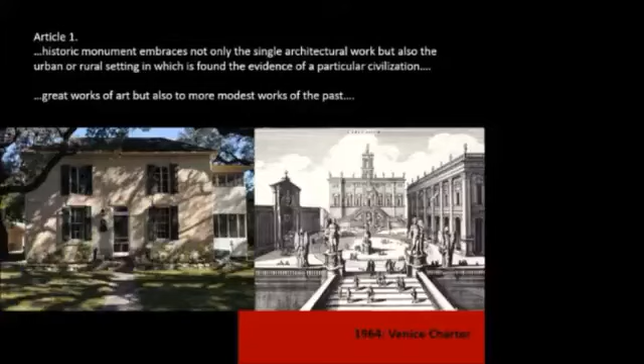So we'll talk a little more about authenticity, but let's go through some articles from the Venice Charter about historic monuments — not just single architectural works, but things that are all-encompassing, not just the great works. Conservation treatment — here Venice uses the word conservation, in the US we use the word preservation — permanent maintenance, appropriate and useful purpose, retain the setting, that's part of the integrity. Do not alter the mass and color by new construction or demolition. A monument is inseparable from the history to which it bears witness and the setting in which it occurs. These are all elements of the preservation treatment in our Secretary of the Interior standards.

A restoration treatment — here the Lincoln Cottage as example — aims to preserve and reveal the aesthetic and historic value of the monument, with respect for original material and authentic documents. The important thing about restoration is that it must stop where conjecture begins — no speculation. As I said earlier, I think restoration is too limiting and something that should be done less and less, but it is still a valid treatment, and there are times when it's appropriate.

More about restoration: valid contributions of all periods must be respected, since unity of style is not the aim of a restoration. Evaluation of the importance, and the decision as to what may be destroyed, cannot rest solely on the individual in charge of the work. So that brings up the idea that we need to have advisory support.

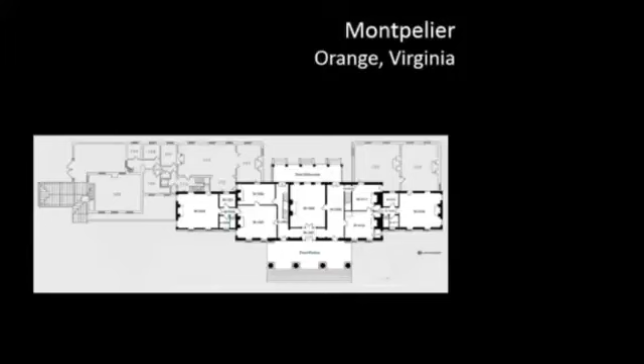So then we have other treatments: we define preservation, and we define rehabilitation. Preservation, essentially the word conservation from the Venice Charter, means to sustain existing form, integrity, and materials—no replacement, no new additions. Rehabilitation allows additions. That's the word we use in our Secretary of the Interior standards to talk about compatible use through repair, alteration, and additions, while preserving character-defining features.

There's a clause in the rehabilitation standards that annoys many U.S. architects: new work should be differentiated from old. Some architects think, why can't the new work just blend right in and look seamless? Why isn't that how architects would do work in centuries before? Sometimes that's appropriate, but the standards do not allow it.

Now let's look carefully at case studies here and get into some interesting issues with the Farnsworth House and the Johnson House. While they may look similar in terms of being glass boxes with a core that holds their infrastructure and no interior partitions, they are white and black, floating versus anchored, and one is very austere and the other is actually quite comfortable.

Any guesses on which one? You can tell which one's white and black and which one's floating versus anchored. The austere one is the Farnsworth House. It's sublime, but very, very precise and straight and formal. The Johnson House, somehow, while it looks so similar, achieves a level of comfort where you can sit in it all day long. I've worked in both houses, and you can spend 8 hours in Johnson's house and be totally relaxed. I think maybe that's a difference in the two architects that transferred into their work.

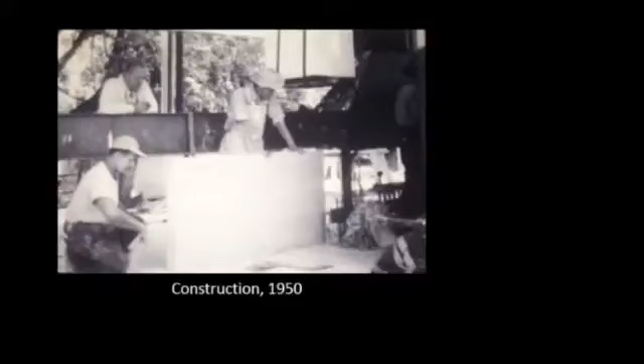So this is Mies van der Rohe overseeing the construction, selecting the travertine. He selected them very carefully, in the manner, I suppose, that a painter would select the stroke of an oil brush on a painting.

He picked each piece. Many were rejected. The archives show that many of the travertine panels that went into the house were not to his liking and were sent back.

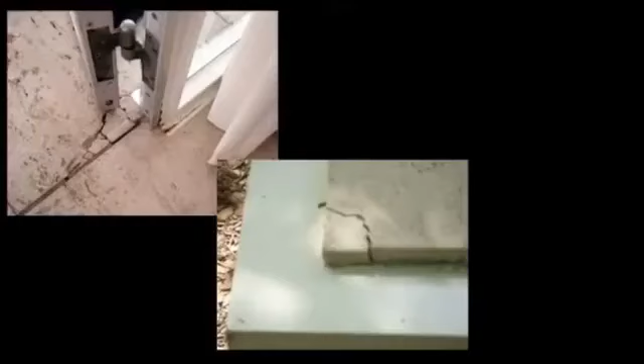The travertine is cracking, and there are areas where it's displaced and it's a tripping hazard. Presently, the owner is living with these conditions because in order to get the travertine out, you'd have to destroy it. It's glued down into position.

So you'd have to have a new piece, and similar to that oil painting analogy, it's as if you were going to carve out a piece of the master's oil painting and put in a new piece of oil. It's a very difficult decision, and nobody wants to make it, so it hasn't been done yet.

But there are more problems. Because of the air conditioning, we discovered through condition assessment that corrosion happening at the glass stops is going to soon break the window, because of oxide jacking and the rust of the steel lifting the piece of glass to the point of shattering it. The details of construction, because Mies never made any drawings, are only guessed at—

—or so we thought, until we took a careful look in the Museum of Modern Art and found that there were steel shop drawings. On the shop drawings there are notations made about how the house is constructed, from the field notes, and so it helps a lot.

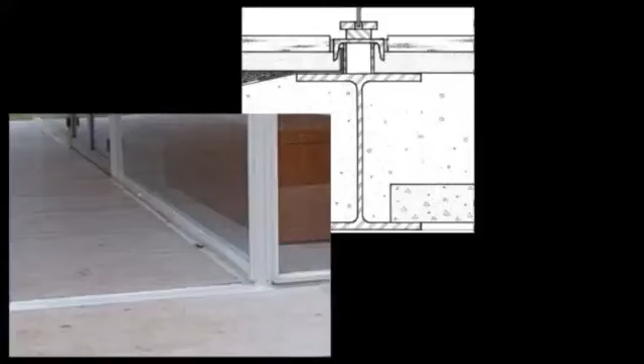—you see that same detail here. The corrosion is all happening in the corners, the worst one being this corner over here on the lower left.

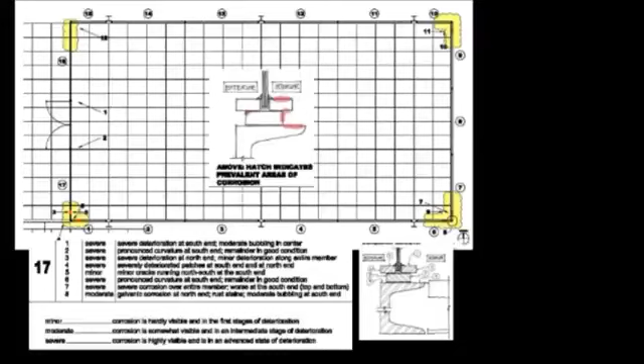So in assessing all the different pieces and looking at the pattern of corrosion, and then observing how the curtains are always kept in the house and the conditions of the HVAC running, we determined that there was a microclimate being created behind the curtains—an area of extreme condensation and water constantly dripping on the inside face of the glass, which was the source of the corrosion.

And what do we have? Condensation occurring behind the curtains. So the problem is with the HVAC, which we can't really get rid of—or can we? Maybe, because the visitors are only in the house for 25, 30 minutes. Maybe on a hot day they can be hot.

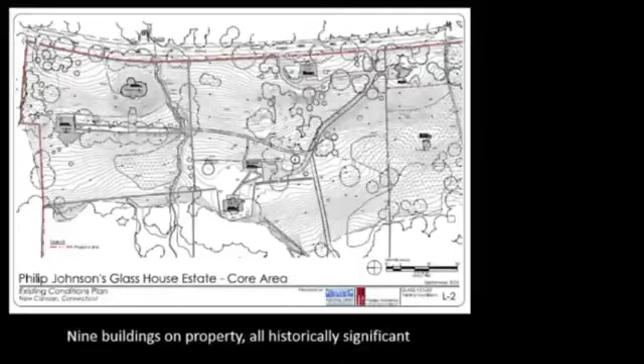Plus, the local community didn't want a visitor center, because New Canaan is filled with very wealthy New Yorkers.

Going on time? Going well.

But when it's a public facility, you have to accommodate people with disabilities per our US laws. So these pathways had a cross slope that was too great—they had to be redone. There are hazards, tripping hazards on the site, areas where people could fall.

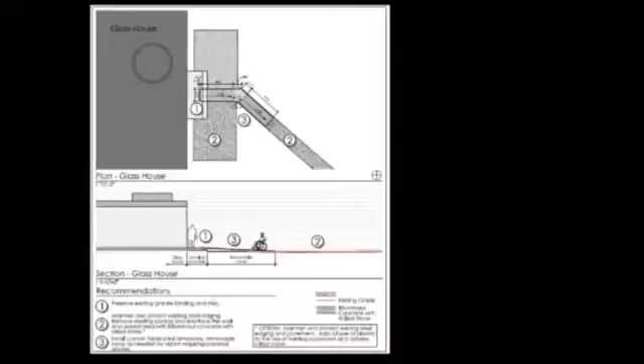Barrier-free access at the house requires a ramp. It sits in storage in the guest house. It can be assembled in under 20 minutes. They have used it, and it works.

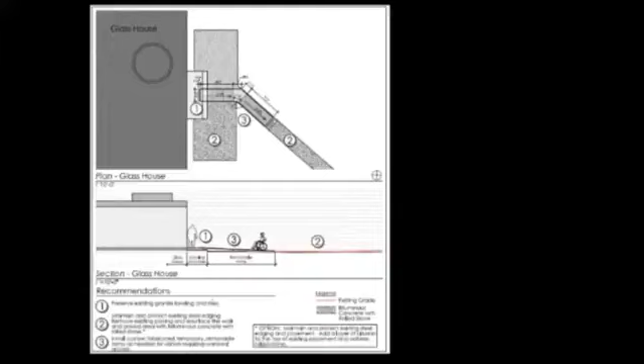I asked last week, that was one of the reasons why I went back. I said, does that ramp we designed actually work? Or has that ever happened where you had to use it? And they said yes, the staff doesn't like assembling it, but it can be done. Because of the way the tours work—advance tickets—you arrive first at the visitor center in the town of New Canaan, and you show up at the site approximately 30 minutes later. So the staff has time to assemble this, and then they take it down again later.

Now, when you have a glass house in the country, occasionally you'll have a wild turkey that flies into the glass.

For those of you who know glass, tempered glass is different than plate glass. It looks different, it's made differently, and tempered glass has a little wave to it. So this creates a big problem for those dealing with mid-century modern buildings.

Fortunately, Johnson lived there long enough that he'd already broken pieces of glass—turkeys flying into it, and he actually broke one with his shoulder when he was very old and fell. He rolled into a piece of glass. He wasn't hurt, but the glass had to be replaced. He always replaced it with safety glass. So we had the precedent, and we could just go with safety glass when we did the replacement.

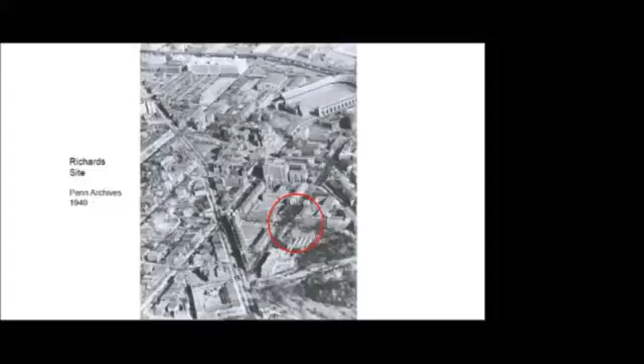So here's the site on the West Campus in Philadelphia, and then the plan and a couple of quotes about the building.

This quote from Louis Kahn is really about the idea that he thought scientists work like architects and wanted to build open studio spaces. Those blank spaces you see in these three buildings were meant to be open labs. By the way, the Richards Laboratory is this grouping, and these two buildings here are the Goddard Labs, also by Kahn, added later. They were not buildings we worked on in the renovation. They don't quite have the purity of design of the earlier buildings, but they are nonetheless very much a part of the complex and part of the fact that it is listed.

I should mention this is a National Historic Landmark, so it does have a degree of protection that is rare for institutional buildings. It's very rare for a college or university to allow one of their own structures to be listed, no matter how well they value it. That's just not, so to speak, the American way.

You see there's a series of served spaces that revolve around this servant tower. This is something Kahn is very famous for, and it's probably the most literal interpretation of the servant versus served idea, because he actually makes separate buildings out of each of these, and you can read them very clearly. Finally, the Vincent Scully quote: 'They are a town of colleagues, but function not perfectly at all.'

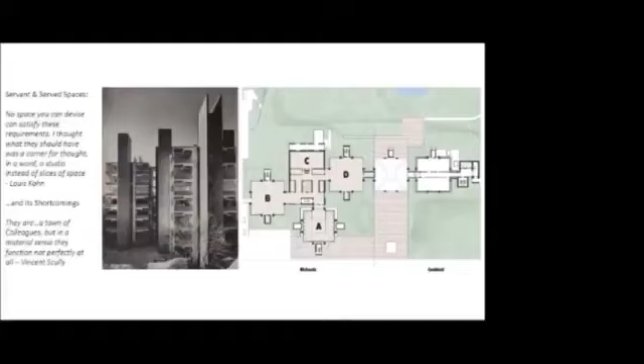The building had a lot of problems, which we will get into as I go along here.

Here you see the ideal on the right, really, which is the structure. He worked with an engineer named August Komendant, an early visionary concrete structural engineer. They developed this Vierendeel truss system hung off of eight columns in each of the towers, with a lot of cantilevers, and there you can see the purity of the grids, the primary grid and the secondary grids. That's the reality, the kind of open reality that Kahn looked for in this building.

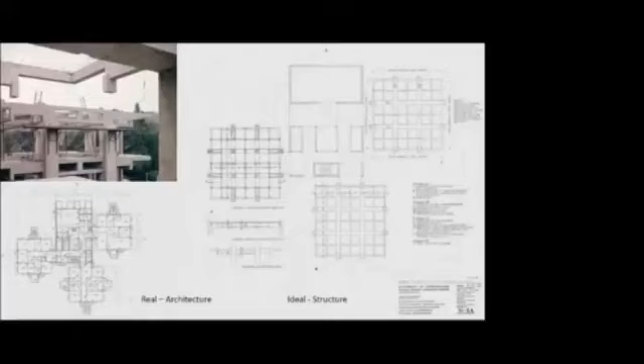Whereas the real—that's the ideal, rather—this is the architecture, you can see it divides into lots of little spaces, which is not Kahn's idea, but it became, in fact, the way the scientists wanted to work in the laboratory. They never really got everything to fit. Even though there was a system designed to accommodate these walls, it's not something we had the sense that Kahn ever really wanted present.

So here you see the building being built. It's very apparent about the way in which the structure reads. This is probably, there is a more overt reading of the structure in this building than in any other building Kahn designed. This is sort of the apex of that idea in his career.

He was working not only with August Komendant but also with Anne Tyng in his office, with whom he also did the art gallery, and began these explorations in structural concrete systems to find ways to weave the systems in along with it.

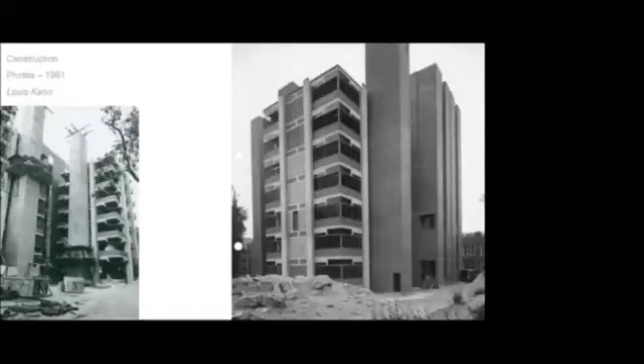I love this image because this is before they filled in any of the interiors, and it really just looks like a stack of vitrines, you know, a pristine stack of these wonderfully taut, minimal vitrines. This is really the ideal, the notion we always had to come back to as we were doing our work, to make sure this kind of reading continued to be felt.

And this idea too, that the way he groups these communities of scholars and scientists, you can kind of look into your neighbor's laboratory and get a sense of this communication. It very rarely happened, in fact, but it was very much a part, too, of what Kahn wanted to happen with this building.

Looking at Kahn's development, it's very interesting to look at his developmental sketches, because you think of his work as being highly disciplined and highly rational, and you realize he comes with this very broad, zigzagging path and tries out a little bit of everything before he finally gets to the resolution. I think this is a perfect example.

The other thing he was obsessed with in this building was the fact that this is his first laboratory, and that you have to move vast quantities of air in and out. So he's imagining here with these stacks, saying you need a certain amount, and as you go up the building, you're getting more and more air that you're having to exhaust out the top. This is a very literal expression of that.

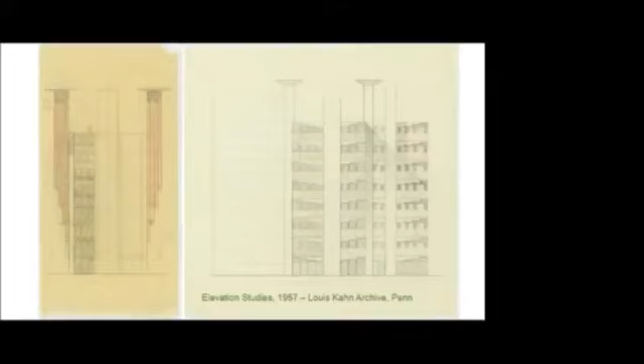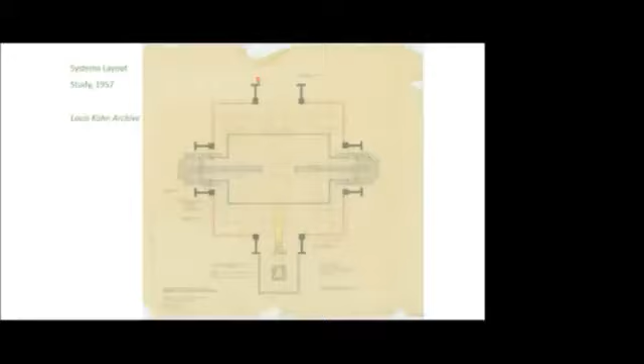Here again, a very early sketch. This is the plan view of that sketch with these vent stacks walking up the building, the idea that this is happening in the very early stages of design. So right from the beginning, there's an integration of the systems into the building, and the way the engineering systems become also a character-defining feature is very important to the reading of this building as the design evolves, and as our renovation scheme also had to evolve.

So here you see some of these design principles. This is a nice photograph of the space showing the open floor. This is the way Kahn wanted it before they put in the partitions, before they cluttered it up with a lot of things, and you can see the organization of the building systems overhead.

What this drawing here does is it shows you exactly how they are stratified. I don't expect you can read all that, but it tells you where the ductwork goes, it tells you where the wiring goes, it tells you where the plumbing goes, and how all of that is supposed to work. He even has these sort of details for how to come up and down through the building in order to keep everything in its proper stratum.

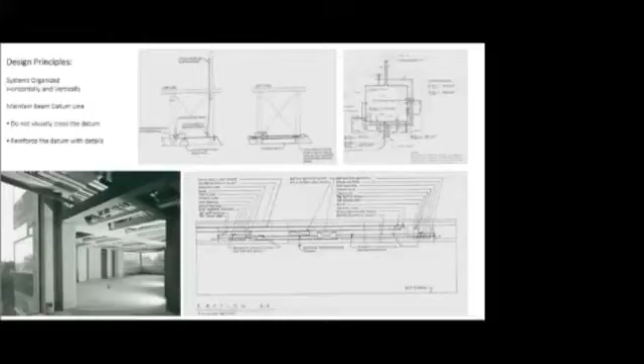The fact that these principles were not always held to as the building evolved over the years, and changes inevitably had to be made as happened in any laboratory building, that's one of the things that really compromised the character, and that we had to set about changing as we began to develop our renovation.

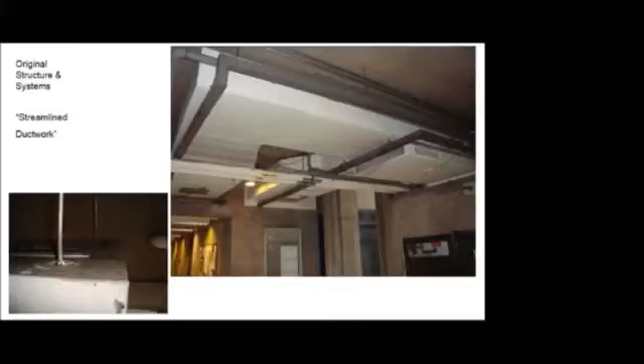So here, some of the most exquisite ductwork, for anybody who's a kind of geek about ductwork. He got the most incredibly beautiful, seamless ductwork put into this building, and that's something we actually had a little bit of difficulty with in doing the renovation, to achieve that same level of quality in the work we put back that was done originally. We also found out in the course of doing this that Kahn was not happy with the original installation, and went in and had the contractor tear everything out and do it over again, much to the university's consternation, but to the benefit of us as architects and historians admiring the quality of this work.

Here's a diagram of the supply and return, showing again how all of that ductwork interleaves with the structure. This is from a book by Thomas Leslie called Louis Kahn, Building Art, Building Science, and it shows you in kind of wonderful detail how all of these various pieces go together.

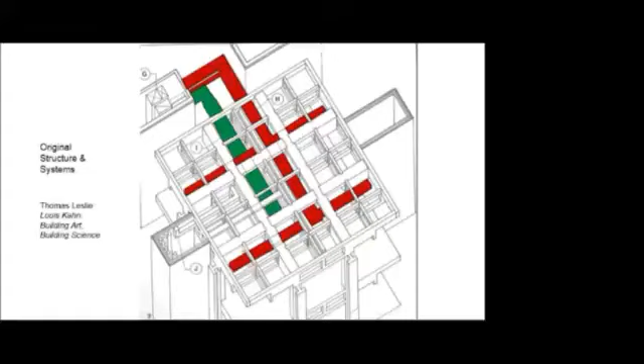So this is all stuff that we had to understand and put into the design and preservation guidelines to be able to accommodate this in a new way as our design evolved.

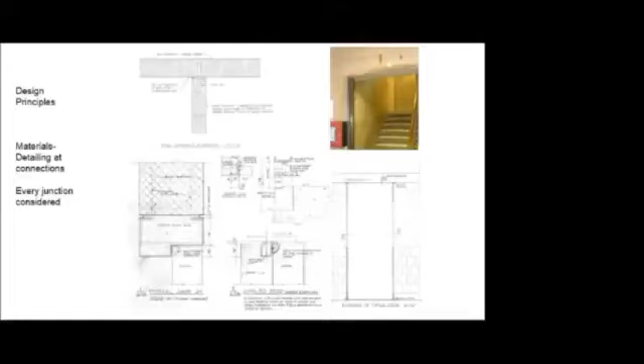This gets a little obsessive, but it reinforces the idea about how simple, straightforward, and precise our interventions needed to be in order to work. It wasn't that we were copying anything he did literally as we changed things, but there was a spirit there we had to honor for this to be successful, and precisely the things that had made it fail in the past were because people didn't recognize that and made little adjustments which really weren't appropriate to making the building work.

Light fixtures being placed in off-center locations, and particularly things like running these conduits down through the wall where they're really not supposed to go. So in working with a maintenance staff that didn't always understand the building the way it was meant to be understood, these things kept happening over the years and began to diminish the quality of the building.

So here are basically the list of challenges we went through in working with the building, and I'm going to concentrate right now on the envelope, because I think a big theme of what I'm talking about today is how one handles the glazing in a building like this, since it is such a critical character-defining element, and getting that just right is very important. Those were the problems we're dealing with, and these are the adaptive solutions.

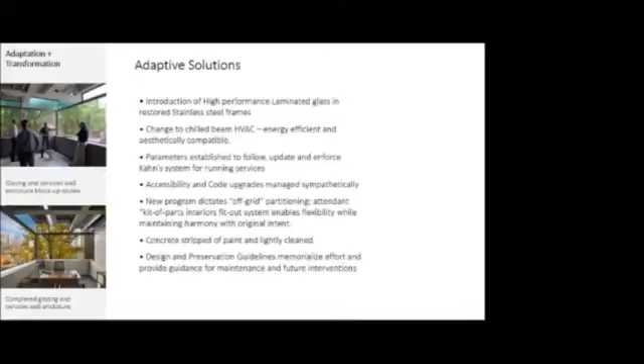However, Kahn was not happy with these windows because he felt that they were imprecise, that they used too much material, and that the fact that the shapes are rolled means you don't have precise corners and edges, and that there is basically just far too much going on for what he wanted in his architecture.

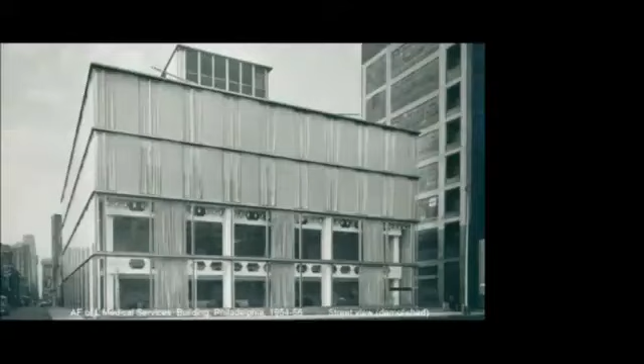So in his next building shortly thereafter—a building that unfortunately does not exist anymore—this is the American Federation of Labor Medical Services building in Philadelphia. He starts to develop, and you can see now all of a sudden far, far less in the way of windows.

You have these strong dividing lines at the floors, and then very, very minimal mullions separating the glazed and the fixed panels within the building.

The way he did this was he did several explorations. He looked first at a steel system, like Yale. He rejected that. He then went to an aluminum system, which was also starting to be fairly common at the time, and he didn't like that either because you had to use too much weight in terms of the aluminum being not as strong as steel.

So what he finally starts to develop is this bent stainless steel plate. This is heavy gauge stainless steel plate that he forms on a brake metal, like roofers do. It forms into the shapes you want. And glazing the windows, putting the glass directly into these frames - there it is, with a little stop, there's the glass, and then these frames like this.

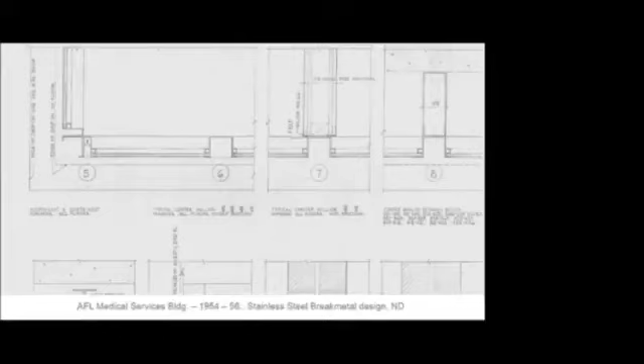Now, this makes for an incredibly elegant glazing system. And it is the system that he then carries forward into Richards. This is one of the working drawings for the Richards labs.

But it brings up a real question, of course. If you're going to be working with this, and it is conceivably certainly one of the most, if not the most elegant glazing system I've ever come across, but it doesn't have a thermal break. So it is something that one needs to understand.

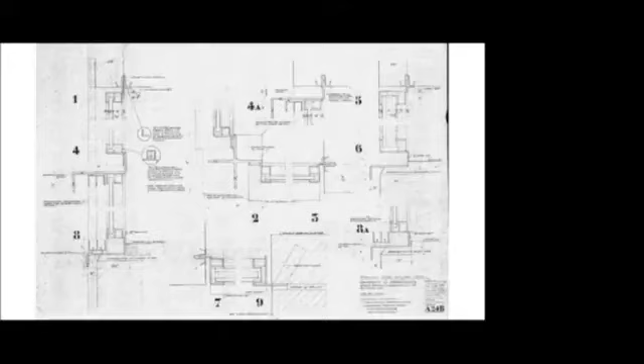If you're working with this as a heritage building, you can have the kind of leeway to provide or not provide the thermal break. But as a matter of due diligence, we did look at seeing whether or not a thermally broken version of this could be done and with insulating glass.

But let me first show you that he continued to develop this throughout his career. The next major building he does is the Salk Institute in La Jolla, California. And at the Salk, whereas you think of Salk as having these beautiful wood windows in the studies, in fact, the laboratories are all glazed with a system like this, which is basically a continued evolution of this same idea.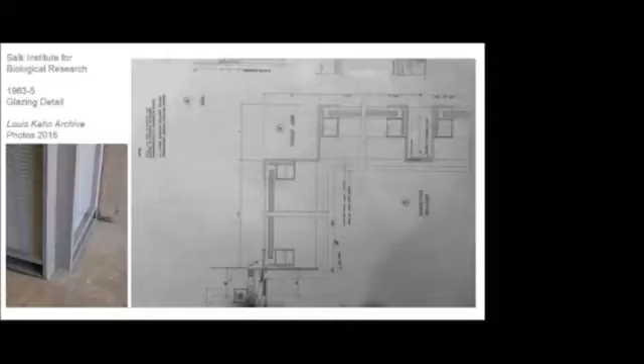So he uses this right up until his very last building, the Yale Art Gallery, the second Yale Art Gallery, the Yale Center for British Art in New Haven, and really brings so much of what one thinks of as the character definition of these huge expanses of glass with almost nothing holding them in place, much less than would be evidenced with a typical steel frame, comes from this exploration. And this was something that we felt was very important to acknowledge and celebrate as we were developing our renovation.

So here is that evolution. These are corner conditions at each one. So first at the Yale Art Gallery, there you see conventional steel, probably looks very familiar to most people. Next to that is what he did at the AFL building. At Richards, he develops this incredibly elegant cruciform corner post to hold the system together.

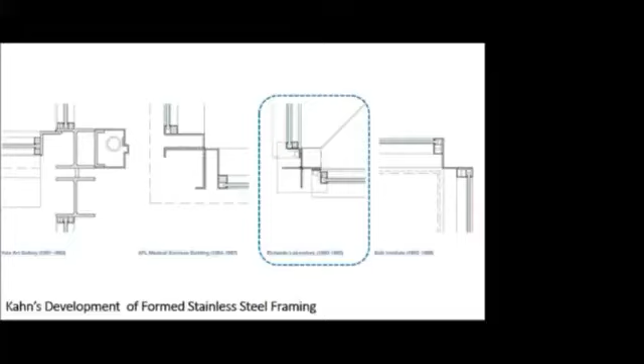But in all of these, there's the idea of the reentrant corner, that he's really making this corner as a reentrant corner, and then finally simplified at Salk. But at Salk, you're dealing with a structure that holds the glass at the top and the bottom, whereas you're not at Richards. At Richards, that post floats free and creates some issues.

So here is Kahn's elevation and the actual profiles of that glazing system. It's a very taut, minimal system, very little projection, and what's interesting to me is that I heard a lot as I was learning about the history of modern architecture about the development of minimal glazing systems, and no one ever talked about this one.

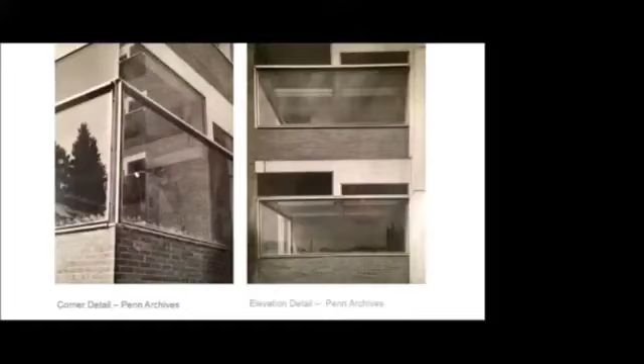What you did hear about was this building, which is the Marine Midland Bank by Gordon Bunshaft of Skidmore, Owings and Merrill, 10 years later than Kahn's building, and he proudly proclaims that nothing on this building projects more than half an inch - a few millimeters beyond the face of the building - when in fact Kahn had achieved that at Richards' lab without talking about it, but he achieved it many years earlier.

That line is no longer straight. What has happened over time is that the concrete has crept and sort of sagged a little bit, and the brick has expanded and moved out a little bit, and consequently the corner mullion, which is this piece right here, you see it floats free.

It just has a butt glazed corner above it, so it's a cantilever off of the wall there. So all of that is being deformed, which means that the glass, in many cases, you could actually see daylight coming through where some of the seals had been.

So you had a really serious problem here, but also something to consider as we go back and conceive the renovation and look at the replacement of this: each one of these enormous lights of glass had to really be custom measured, because none of them were perfectly square. They're all a rhomboid or parallelogram or a trapezoid in form, and they also are kind of bending this way as well as being out of plumb. So it makes for some unique technical challenges as you're starting to come up with ways to figure out how to fix that glazing.

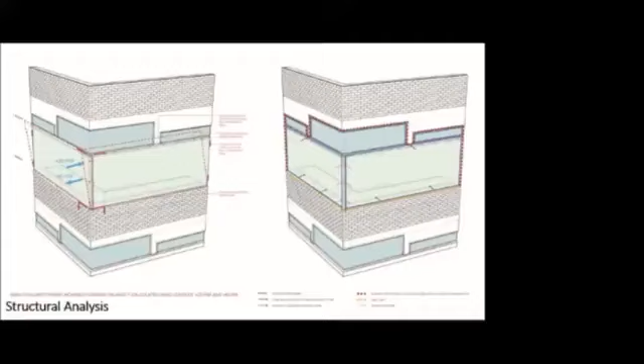The other thing we discovered is that, looking at historical data, it appears the concrete creep had pretty much stopped. The building is now almost 60 years old, and the brick expansion also. So in developing a solution, we could rely on the idea that there was probably going to be very little movement in the future, and we're keeping our fingers crossed and hoping that things hold together pretty well. But there is some elasticity built into our system which can accommodate that.

One of the problems with this building has always been the abundance of natural light and the fact that the labs get very hot and there's a lot of glare, and when you're dealing with certain kinds of sensitive scientific work, it becomes extremely problematic.

This is one of the great ironies of the building: Kahn actually designed this system of Koolshades. These are aluminum screens that were meant to be put on the south and west facades of the building, and they were, and they're operable. The screens are operable, but the windows are not operable, so you can't get at the screen. So once they get fixed in position, you would then have to get up on a lift or scaffolding in order to move the screens.

Why no one thought of this, I don't know, but that is the way it was. In fact, these had a relatively limited lifespan. They were taken off in the 1970s, and we never entertained putting them back. It was not something that the renovation ever seriously considered reinstalling as part of the original architecture.

But there you see this very poetic view of somebody actually putting draperies up here. And then much more common, though, in recent history, has been people just putting up pieces of mylar or cardboard or plywood in front of the window in order to cut the glare and be able to manage it. They painted out the transoms. They did all kinds of violence to this building in the interest of minimizing the sun.

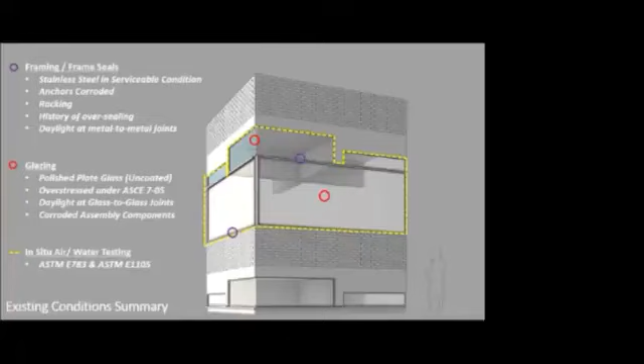So here's a summary of the existing conditions. The frames themselves, the thing that I am so obsessed about, actually remained in very good condition, albeit a little bit deformed. The anchors had to be redone. There were all of the things that I talked to you about already, but these were all solvable problems.

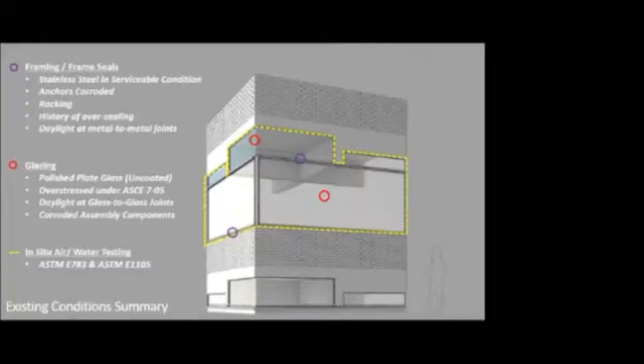So the issue then became really, there's the sort of cruciform corner, but you see that, as beautiful as these frames are as technical objects, there's also this kind of wonderful handmade quality about it. The idea that you're folding this like you're folding a piece of paper, like origami sort of, in order to create this, which gives it a unique quality that is not so technical, but really leans more back towards craft.

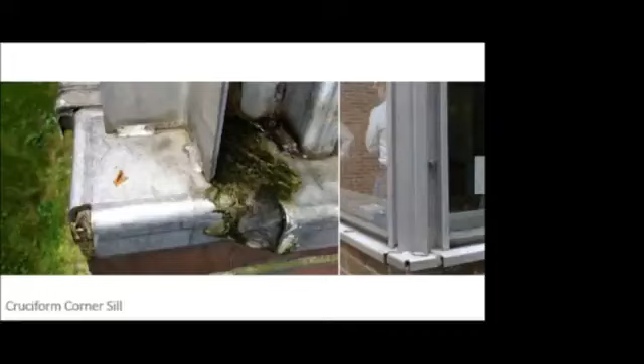So, a couple things. First of all, as I mentioned, we tried to do some due diligence about coming up with a way in which this system could possibly be thermally broken and incorporate an IGU. And these are just my own scribblings on the train one day.

This is for somebody who wants to try this in the future. The way this building was put together, we would have done great violence in pulling the frames out, and it was very early determined as we did this exploration that it wasn't worth sacrificing, because you'd have to take apart the brickwork, you'd have to pull the reglets out of the concrete. There would be a lot of violence done to the building in removing those frames, and the frames were beautiful and eminently restorable. Their only problem was that they did not have a thermal break.

So we looked here, then you see on the existing corner, that's the existing glass, and these were enormous sheets of glass, only a quarter of an inch thick, so a little over a centimeter, a little less than a centimeter thick. And they were 15 feet by 5.5 feet, so quite large.

We looked then at, so here would be an idea about using, this is what you'd have to go through in order to get a thermal break put into this. You can see how elaborate that all gets, and we're not even sure that would work. But here in the middle, circled, is basically just taking the glass that was there, doubling it in thickness, putting it with an interlayer, and using laminated glass.

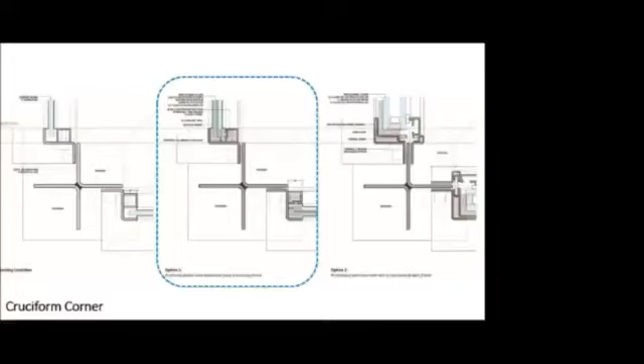So then here you see a sectional view of the typical big window, and these pieces that project out are the tracks that held what were the cool shades. So we left the tracks intact. We did not mess with that. We just didn't put the shading devices back.

So here is our solution, also on these lights up here. You notice some of them are blue glass. The blue was only on the south and west, again meant to be really kind of a token sun-screening gesture—it doesn't really do a whole lot.

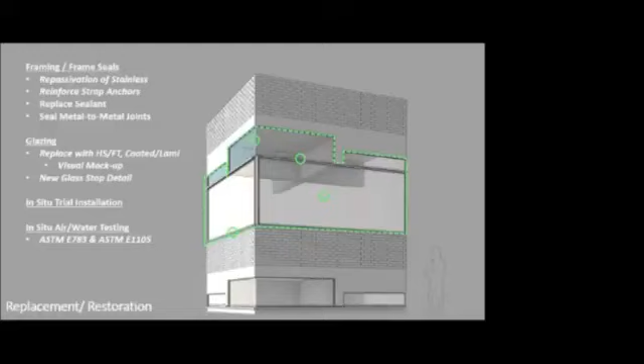So we had to come up with a whole system of interior mechanized shades that fit very carefully on this mullion, in order to really make this work going forward.

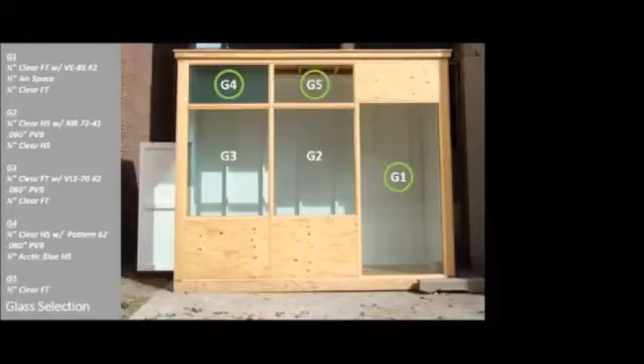So here's the review of the glass types. This was the final review. We started out with about a dozen different kinds. It was absolutely essential that they be flat, and it was essential that they be colorless. So we had to match the color of the original glass, which eliminates a lot of kinds of coatings that are used on windows these days, because we really couldn't have any hint of color.

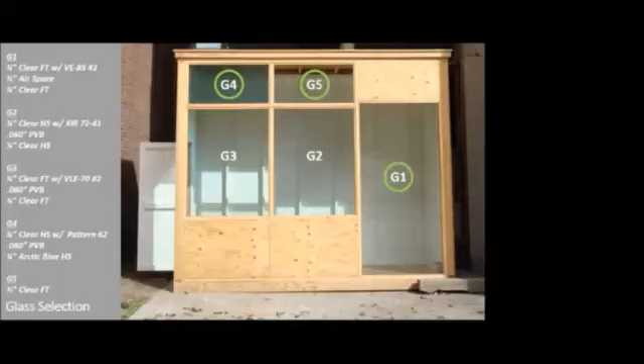This was, because this is a National Historic Landmark, there actually was regulatory oversight to this, because it's part of the exterior of the building and therefore was something that was in the jurisdiction when working with the National Park Service, to ensure that we met their criteria in realizing this.

So then we had the great fortune of having this gentleman, who was the glazing installer, as our contractor, because we presented to him when we were walking him around the project all of the problems with the deformation and the fact that we're using now a heavier glass light, and all of the things that make this a virtually impossible job for a glazing contractor. And you could just see him brighten with every moment. He saw this as the challenge of his life.

I think it's very important, as a kind of parenthetic lesson, that when you're working on a building like this and dealing with these very delicate subjects, you take the time to really explain to the builders why this is an important building and why it is in their interest to do really good work on it. Obviously you do this not in a threatening fashion, but in a way that really says, we want you to be part of the team. We realize that we cannot do this without you, and that we are relying on your expertise to help inform what we're doing to make this the best possible product. It's the only way to really work on these kinds of buildings and get them done well.

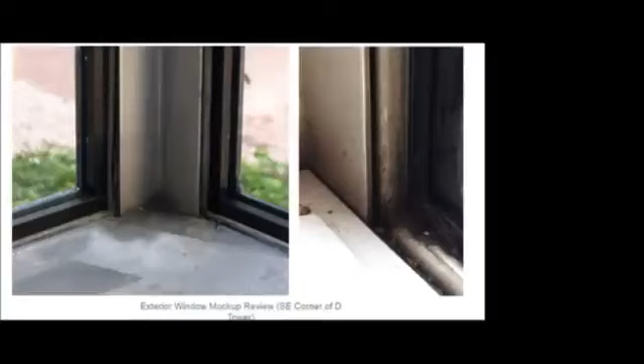It's interesting, the one sort of false bit of technical history here is that we did replicate the same black stop detail that was present in Kahn's original building. They were aluminum stops. However, given the very tight tolerances in the frame and the deformation we had to accommodate, with the glass moving in and out depending on where it was, in the end we had to glaze it in structurally with silicone, so the stops became superfluous. We put them in as a finishing touch so that it looks cleaner, and obviously it looks as it did originally. But in fact, structurally, they have no meaning. They don't need to be there. The frames, or the glass, are anchored entirely by the silicone structure on the outside.

And there's the finished product. Hopefully that's flat enough. So now I'm going to move to the inside of the building, having taken care of the envelope. By the way, I'm not talking about concrete and masonry repair on the outside in this, because it wasn't part of our scope. It's not to say it didn't need to be done, and it could be the topic of a whole lecture unto itself, given the problems with the building, but I'm not going to go into it here, except to acknowledge that at some point it's all going to have to be part of the work.

So these are the goals: efficiency, standardization, but adaptive standardization, and a culture of collaboration. Moving from wet bench, this is an important fact: we moved from it being a biochemistry lab, which means it needs fume hoods and all of that exhausting, to a dry neuroscience laboratory, which is primarily just computers. So a lot of the burden on the original HVAC system, and also the need to have these sort of cellular laboratory structures, went away with this change in program.

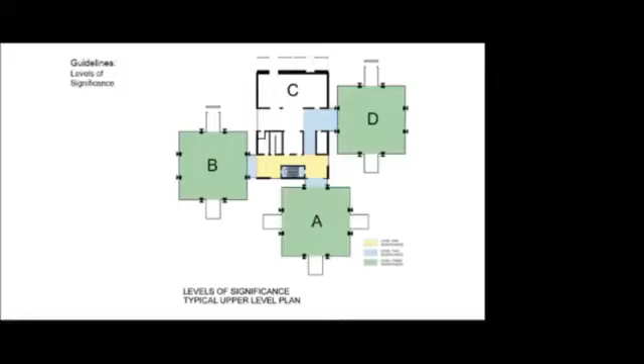The character definition, once you get within it, is simply not to have anything there. But that's not possible, you have to put something in it. So the idea was to establish very strict guidelines, but really give it a category by itself, which is to say that we know you're going to have to change things in here. We're going to give you a menu and a palette for how to do that, and hopefully as things need to change over time, you can continue to adapt this palette to the best needs of the building.

So here, first of all, these are the windowless spaces, so these became the back of house spaces for the Center for Neuroscience. In the old building, this is where they kept the animals and that sort of thing. Then you have the open space, the idea that this is where the principal investigators' offices and workstations are, but it's all laid out in a much more open fashion.

This is a very important point. That corner bay, which you see there in yellow, is too big by University of Pennsylvania standards for an office. But that is, in fact, what that bay wants to be from a structural standpoint, because that's where the structure overhead aligns. So it was very important that we find a way to make these floors more efficient.

The way we do that is to create the three corner offices here, 1, 2, 3, but then by distorting off the grid, which I'll get to in a second, we were able to fit 3 offices in here, and we're able to always leave one corner open to democratize the light and the views, to develop a sense of the great open floor plate that Kahn always wanted in this building. So you're able to increase the workstation density, put a lot more people in an open plan out on the floor.

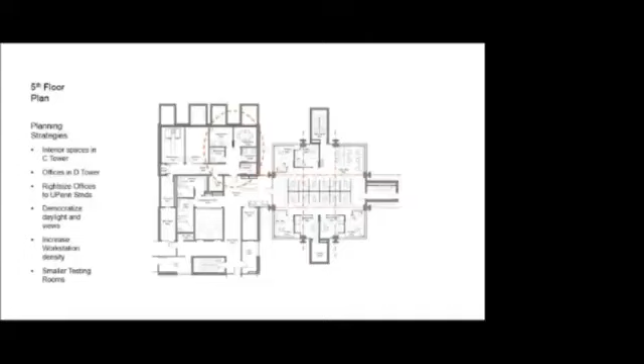And then finally looking at how one then takes and moves off the grid in order to make this work. So what we're doing here is, you see the blue lines are the lines that you would normally follow, and we've offset by about 2 feet in each of these cases, these areas, and created a window within the window right here. This condition is that condition. It's sort of, you can't really see it, but there's a piece of glass inside the other glass.

So in order to borrow light, it's a little tortured, but it actually works very well, and all of a sudden where you only had one office and a very dark workstation, you now have 2 very well lit, very bright offices and a much more efficient plan, which makes our client very happy. All of a sudden it increases the asset value of this building to them because they can put more people in it, they can use it much more efficiently than they've ever been able to before.

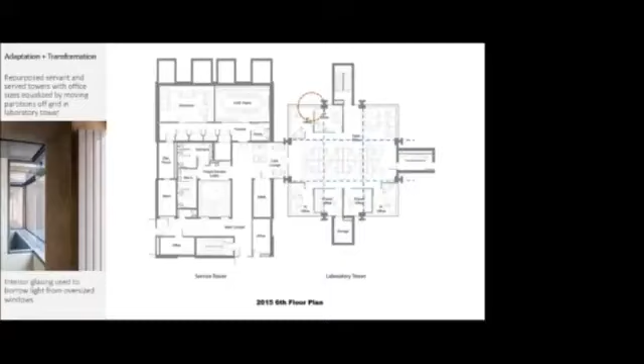And we found a way to do this in keeping with Kahn's spirit, also looking at precedent for the offsetting partitions. Here you see the famous Kimbell Art Museum in Texas, and there's a precedent here. Here's the structural line, but Kahn just sort of uses these, again, the same bent stainless steel plate, he loves it, he uses it everywhere, to be able to move the partitions off with the same idea in mind, that you're creating an interstitial space here. You're actually creating a small gallery within the structure by just pushing these walls out slightly on either side.

Also, as we're starting to develop this, we were looking very hard at Kahn's material palette, not only in this building but in all of his buildings, because it's remarkably consistent from building to building. So we felt that by even looking at buildings like the Yale Center for British Art, the idea of the exposed systems, the raw concrete, the oak and glass, this was a palette we felt comfortable bringing back into the interiors of Richards.

And there you see that's the result before it is furnished. So you have these offsets here, the ceiling offset. There's the line of structure, and there are these acoustic panels. And again, Kahn actually developed just that detail using a different material, but it was asbestos, so we obviously couldn't use an asbestos panel.

We interpreted that with an acoustic matte finish panel, which looks the same as the asbestos panel, and be able to push that aside, which gives you not only better use of the offices, but creates a wide enough space to populate this with workstations, and always has the corner with the view out.

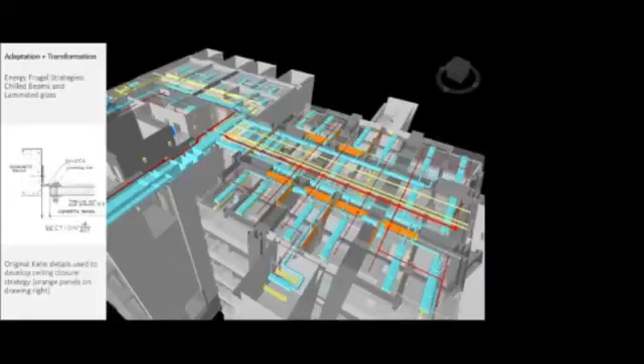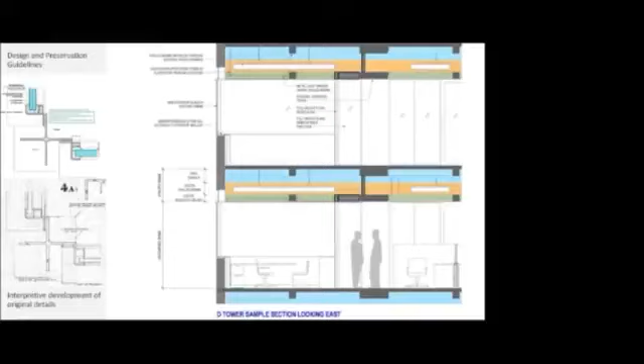And we memorialized this as part of our design and preservation guidelines. We took that diagram I showed you of Kahn's and the working drawings before, and showed people exactly what is meant to go here, what kinds of systems can go in on the floor. So all of this is memorialized as kind of a maintenance manual going forward, so as they continue to do work on the building in the future, they have a touchstone to come back to.

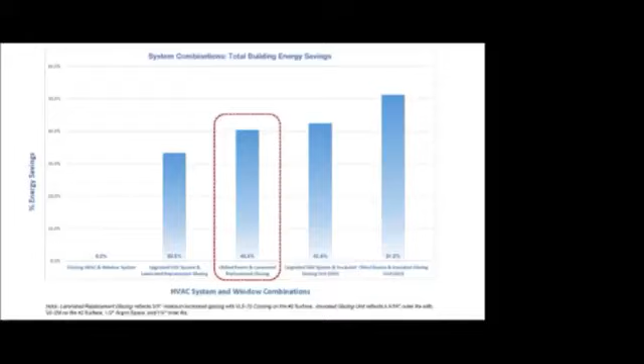Energy frugality was the way in which the University of Pennsylvania in the end decided they wanted us to approach this building. So we are optimizing the energy use, making it as sustainable as possible in that sense. But as I said, we're leaving single glazing, albeit laminated.

We are leaving the thermally unbroken frames, but we are being very aggressive with the mechanical systems, going to a chilled beam system, which now that we've got a better enclosure, now that we have just enough quality from the glass and the fact that the seals are back in place and there's no longer leakage, you're able to go to a much more efficient HVAC system.

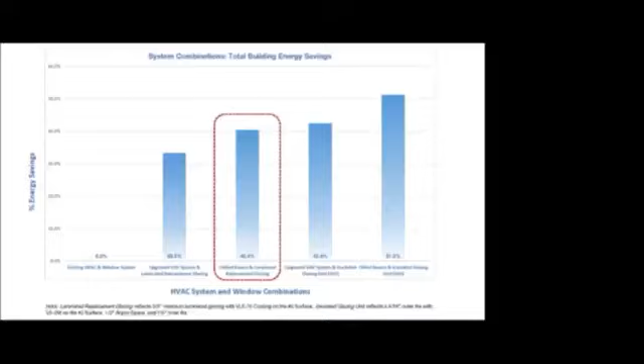So what this diagram shows you is that going from 0, where we began, and if you call this 100%, we're able to get to about 80%. We feel that's a reasonable compromise, to achieve 80% of what would be possible in terms of creating the most energy efficient building. Actually, we may be doing better than this. This was a model done prior to the building going into operation, and there's certain evidence things may actually be working a little better than this.

When we got the job—I'm sorry I don't have a photograph of it—but it was completely cluttered with pipes and conduits and all kinds of stuff. And the effort that went into taking that out was quite monumental. People were concerned, saying, well, it's just concrete. But an amazing thing happened.

We went in and did this, and cleaned the concrete very simply, just washed it down a couple times with a very lightweight, light gauge restoration cleaner—no acids, nothing aggressive, just a simple wash. And all of a sudden the concrete glowed, and there is this wonderful quality about it, and I will call it patina. People don't talk about concrete getting a patina, but certainly the process of carbonation does warm up the color, and there's also the usage over the years, things really embedded in there that wouldn't come out with the cleaning.

They add quality. They add a level of experience and human memory to this as you're walking through, to imagine the things that have happened in this building over the years, and it's really quite a wonderful experience.

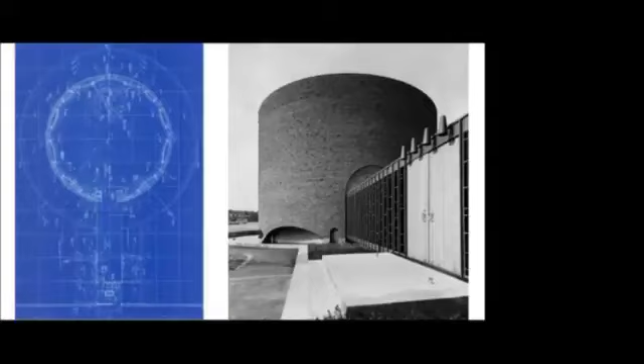So here's the plan, and this is the sanctuary in here, which is within this cylinder. It's only top lit and lit from underneath here. And then you have this sort of lobby or narthex space that takes you into the building.

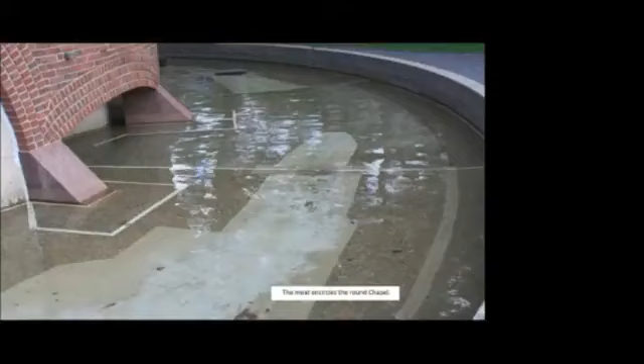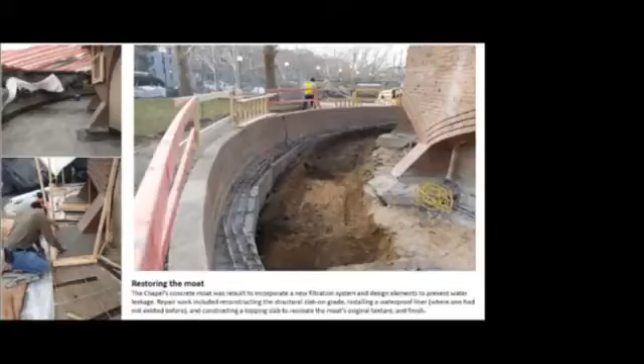We started out with the moat around the chapel, which had deteriorated, and this became, in some ways, one of the most technically challenging aspects. But also, from a preservation standpoint, we realized that in order to repair this concrete to anything like its original form, we really had to take everything out, which we did. We were able at this point to waterproof it and create a wonderful fountain experience within this, but to do it in such a way that ensured you weren't going to be getting water into the building.

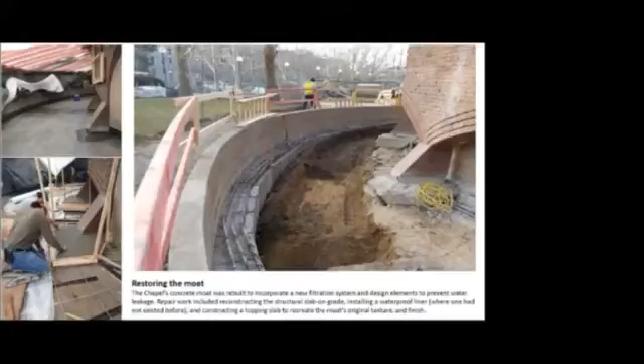And here is some of that work underway. The issue really here was not that difficult technically. The issue here was matching the concrete, working with the conservators to make sure that we really were able to replicate the final finish that Saarinen used on the original building.

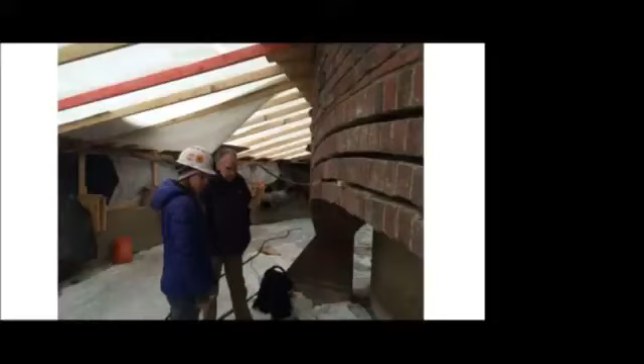There were some structural issues here. You can see that these arches are very deeply cut out, and we had to actually push reinforcement back into that, and then remortar that in a way that presented a fair amount of technical difficulty in order to get that done.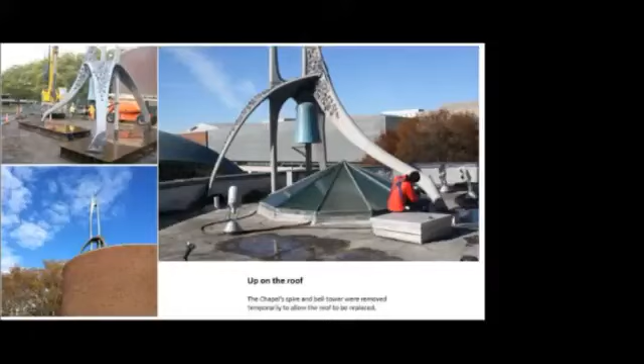This was an incredible day of having to lift this up with a crane, take it off the roof in order to be able to redo the roof, and then lift it up because this had previously been causing leakage into the building because of the way in which that was set. So we had to move it up about 8 inches in order to solve that problem.

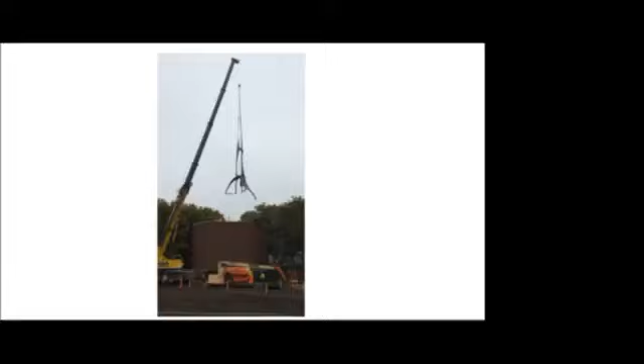There you see that's an original photo when they were first lifting it up into place. There you see the prospect of the tower on the building. This is supposed to be a video, but I couldn't get it to work. But it shows it just being brought over and dropped to the ground. Suffice to say, you get the sense of what happened there.

Now, on the window walls, we have in some ways an analogous situation here to what we did at Richards. The difference being that the steel window walls here are carbon steel. They were highly corroded, and we were not really able to conserve these elements, as you can see by looking at some of these.

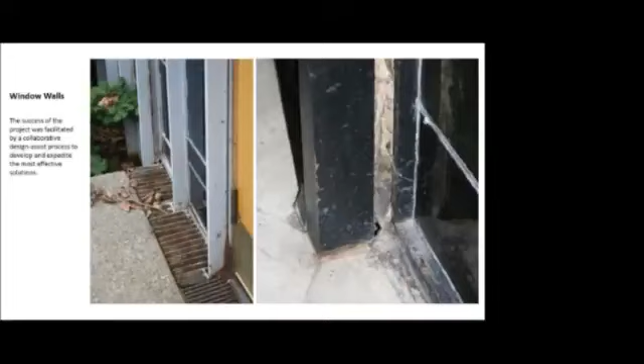So the decision was made instead to conserve the glass. We took all the glass out, and we came up with a revised detail, similar in many ways to what we did at Richards, where this is art glass. This is a German art glass. We discovered that by taking the seeded colored art glass and laminating it to a similar weighty patterned glass, a similar art glass made by the same German manufacturer, with a gel laminate interlayer.

Because the panes are uneven, you can't use the kind of sheet vinyl interlayer that you would normally use in laminated glass, but a special gel was developed that you can inject into that so it fills all of the voids, and you really can't tell that it's a laminated light. It still just looks like the seeded leaded art glass that it was to begin with. But you can see the difference—it just gets a little thicker, basically very, very little difference.

The only thing that we did do here, though, is we took that existing frame, and when we put it back, we put it back in stainless steel so that we would not have the corrosion problems.

Here again, the decision was to treat this as a work of art, to say that we're going to be energy frugal, but we're not going to optimize it. We're not going to try to put in insulating glass or make a thermally broken frame. But as an exercise in trying to make a stained glass wall more robust, it's a very good exercise, because there were safety issues with this too. People were breaking it because it was very fragile, and that is no longer an issue now that it's laminated.

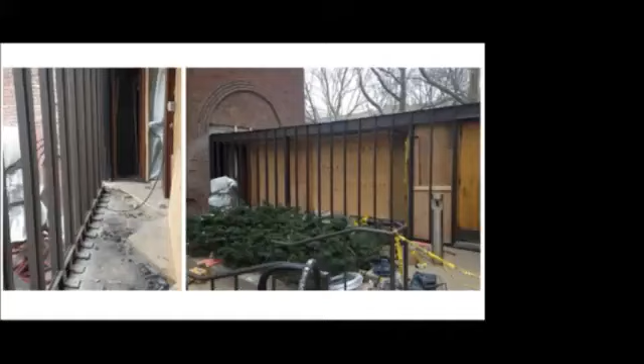So here is that work in process, and the finished product, looking down the way into the sanctuary.

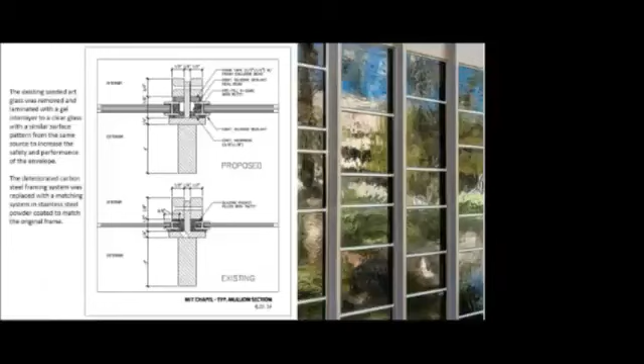The other thing we did was address the corrosion of the window walls at the base. The issue being that a lot of the travertine had to come out at the edges and be replaced, and we were able to source where the travertine had come from originally. We were able to find more of the same stock and replace it in kind, so that you really can't tell that these pieces were new.

And we also, through paint research, discovered that it had really been a much more mauve-brown color, so we powder-coated the stainless steel, and we now really have restored what Saarinen's vision is.

And then finally, on the inside, I mentioned running the upgrades for code and fire protection. If you look closely, you can just see these pipes snaking up the back wall, and they come up above the ceiling in order to provide sprinkler fire protection, and also this line here is a little higher than it was before in order to provide fall protection for the organ.

These are things that are mandated not just by the code, because the code will sometimes let you get away with this on a historic property, and the Cambridge Historical Commission was perfectly willing to give us a buy on this, but MIT's insurance said no. We are upgrading this building. We're going to make it as safe as possible. We have too many liability issues to enable it to be any other way. And we agree with that. My philosophy, having done this now for 25 years with buildings like this, is that's the right thing to do, and you just find a way to accommodate it as best as possible.

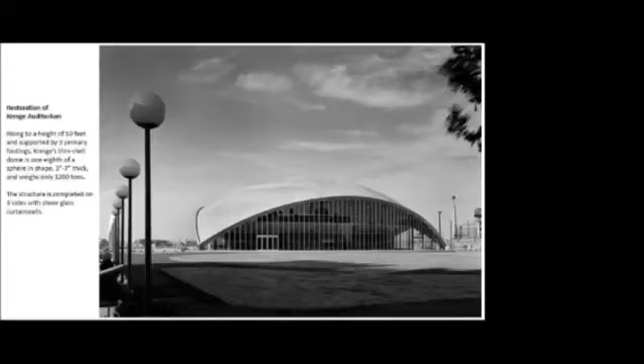But it's an interesting evolution, because one of the questions that came up when we began the work is, do you go back and try to do this? They said, well, maybe this is not what Saarinen wanted, but it is historically -- this was the original roof, this is what the historical record shows the building had on it. It didn't work. I think there was a very good argument that that roof was put there in haste as a stopgap, because the roof they had designed simply wasn't going to work. It was seen as a kind of temporary measure to be finished when the right solution came along.

Here's the dome under construction. It's quite an amazing piece of work.

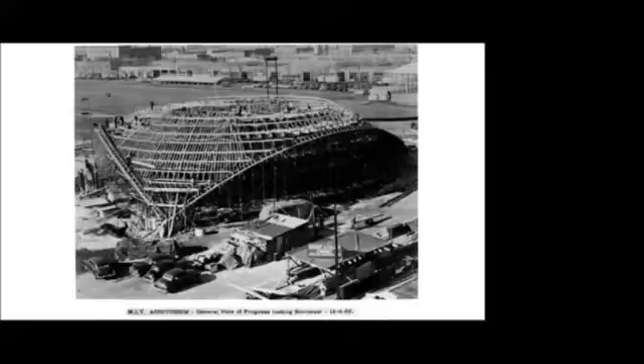So the original curtain wall that was put in was an aluminum system, and like so many curtain walls of the 1950s, they kind of made it up as they went along. It was seriously technically flawed from the beginning, but given that this building is nothing but three curtain walls and a roof, it's obviously a highly primary character-defining feature, so we had to come up with a way to keep this building essentially looking like this, but with a much more robust system.

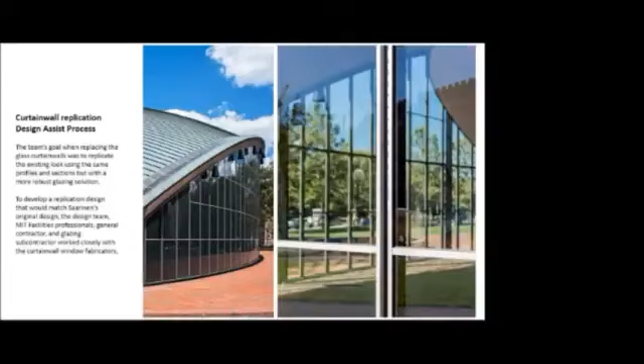So here to give you some idea of the condition, there you see the typical piece of framing coming to the ground. All of the steel is corroded out there, and all of this failed along the bottom. On the inside you're starting to get the same kinds of failure, but they had also put this very unfortunate coating on the brick, which we had to remove later on. Part of that reason was to stop moisture infiltration.

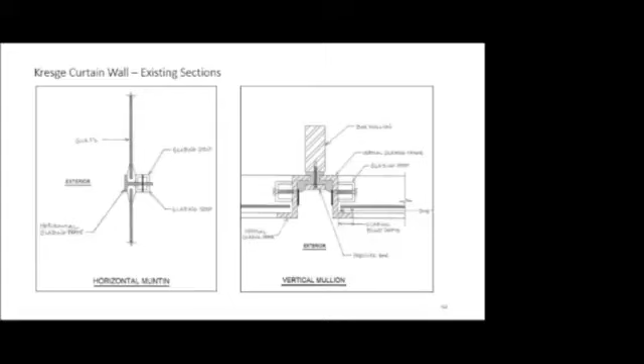On the left, this is the original framing for the curtain wall. It's a very naive system. You have an angle here and an angle here, and you have a gap. So what you're essentially relying on is simply the pressure from this screw and all of that sealant to keep water out of the building. Not a system that engenders a lot of confidence in terms of keeping water out of the building, and in fact it didn't keep water out very well.

So what we came up with, that hat-channel shaped profile, was absolutely critical in the aesthetic of the building. We developed a much more robust detail, again going from single pane to laminated glass. Here's the laminated glass, in this case going from an 1/8 inch to a 1/4 inch, since the lights were smaller to begin with. We did the same exploration of testing an IGU, but it simply wasn't going to work.

Frankly, given that most of the building use is within the auditorium, which is a building within the building, the tempering of the lobby space was not that critical, and it isn't actually that big a burden on the HVAC system.

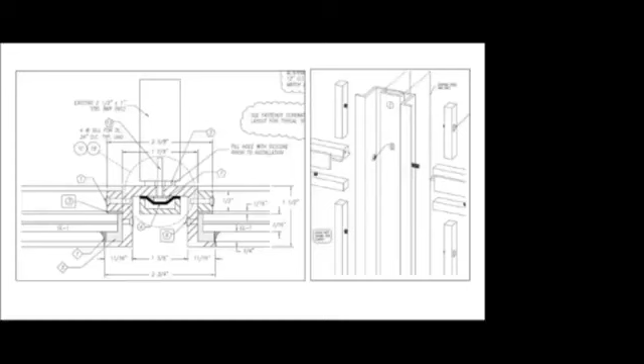So we worked with a design-assist contractor, and here again, as we did at Richards, we brought on builders early to help develop these details. As much as we know and would like to tell people what to do, we are not the people in the field putting these things in place, and we want to make sure they have both the capacity in their shops to fabricate these elements and then bring them to the field and put them on the building properly.

At the base of the dome, there was a lot of corrosion because all of the water comes off at these three points, and all along the leading edge as it goes up, there was a concrete restoration we had to do, but only really at that edge, and then this was completely rebuilt. We had to take this apart, take it down, redo the drains, and then completely strip the concrete off, put in new reinforcement, and put that back together again.

We also just did a little bit of the roof. The roof in the 1980s had finally been changed to a copper roof.

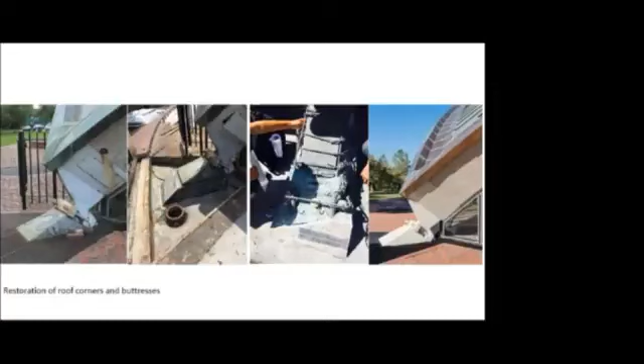Let me get you to that picture. There it is. This roof, by common agreement, the concept for it came from a vice president at MIT who was in charge of facilities, who was tired of twenty years of trying to fix the roof on the building. He sat in a meeting one day, did a sketch, and said, why don't we do something like this? It was worked up into a design, and besides the fact that it works technically and everyone feels it looks pretty good on the building, there's an interesting cultural aspect to this—the idea that a frustrated client says, you know what, I've got a better idea, I can really make this work in a way that it hasn't worked before.

It becomes part of the story of the building, part of its history, part of its lore. And it has held up remarkably well. The only failure we had was that a lot of the seams along the back here, and at the very top, were starting to come loose. This had become such a hot point for water and snow coming down that we felt it was best to just accept the fact that we're going to redo that.

There was also a question: now you've got this brown copper, and it's going to take a long time before it turns the same patina as the rest of the roof. Do you artificially patina it? We decided no, let's be honest about this. This is a repair that needs to be made. It's made very well, the same at all three corners, so it doesn't look accidental, and it will weather in its own time.

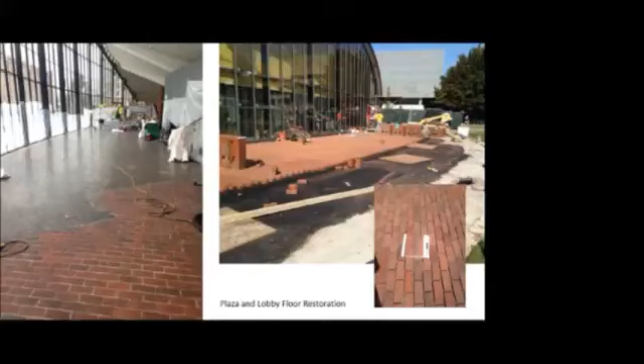This is an interesting debate, I won't go into it here. I think here we were able to match it close enough. We spent a lot of time picking bricks, and it's extremely close. But the difference is that it no longer has this mortar joint pattern that it had before. These are much tighter joints, and you can tell the difference as you look at it.

On the inside, again, we had to run services through the auditorium and make it accessible, so there were changes made down in the front here. We had to remove some seats, and we hid a lift behind the back to get up to the stage.

And then you can see these lines on the ceiling, if you look closely, and that's the process of putting in fire protection. We actually got the contractor to scribe the pipe with an arc, to curve it so that it fits the dome, making it as little intrusive as possible while providing sprinklers for the space. And that's it, and we're on time.

Well, thank you very much, David. It was a very interesting and in-depth presentation of a couple of projects.

I guess there must be questions about these technical details, maybe, or the approach about how to conserve some of them. No one?